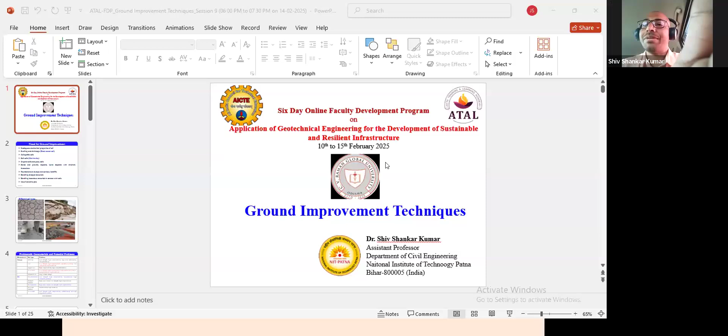So, Shiv Shankar, let me please share because we are presenting through mobile, so I should share. Yeah, please, I request you to please share. Yes, I understood. So, can you see the screen? Yeah, I'm able to see. So just let me make it big screen. Yeah, thank you. Please continue.

Thank you, Dr. General, and the team for giving me this opportunity to talk in this faculty development program on the application of geotechnical engineering for sustainable development and resilient infrastructure. The topic which I have been given is ground improvement techniques. It was challenging for me because I have mostly worked on the dynamic properties of soil, but it was interesting to see what new things can be presented at

this platform. What I will be presenting is the work of one of my students, currently doing a PhD under me, but this work was completed during his master's program at IIT Guwahati, and it is related to soil reinforcement. Here I will not only be presenting and discussing, I will also give some ideas where students can do research. That I will be putting at the end.

But yes, there are many things that can be done in ground improvement techniques. While I was looking into this, I understood that. So I tried to bring it here, especially for students doing research. They will definitely benefit, take some points from this presentation, and can go for the research as well.

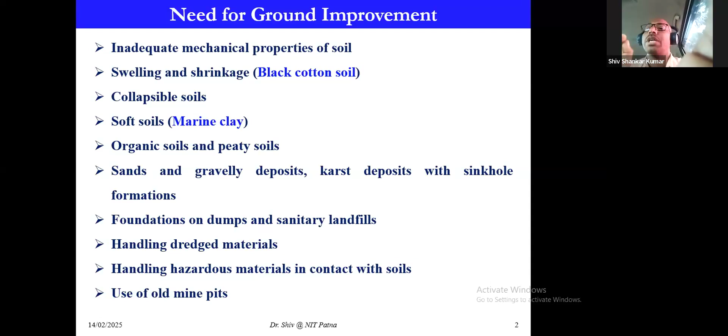So in whatever situations I am showing here, everyone can agree that yes, there is a need for ground improvement. Next, please.

So what are the criteria, and how this kind of cracking should be stopped or minimized, we need to look into. And yes, people are doing research as well, and you can also do research on what remedial measures are possible for this kind of cracking.

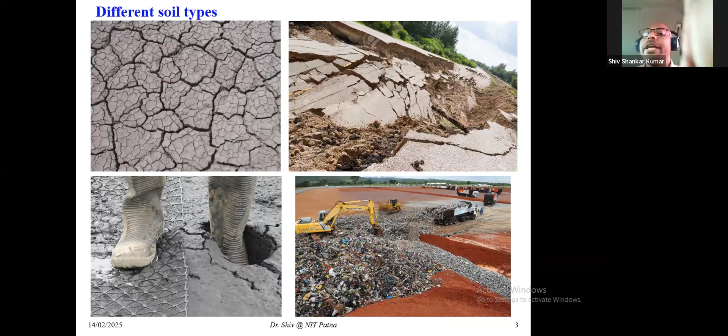So once you identify the problem, you have to find the solution as well, because as an engineer you have to find the solution. There might be places where the codal provision doesn't work properly, but you cannot say the codal provision is not working and deny the work. No, as an engineer, as a practitioner or academician, we have to look into the solution, and that way the major outcome will come up at that particular site. Next, please.

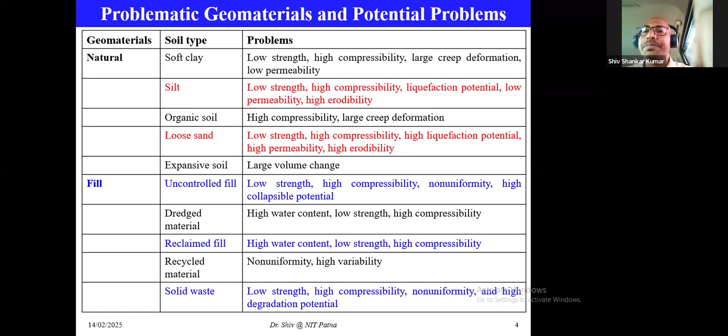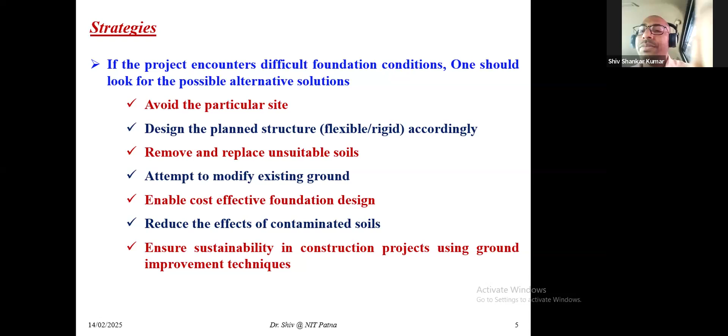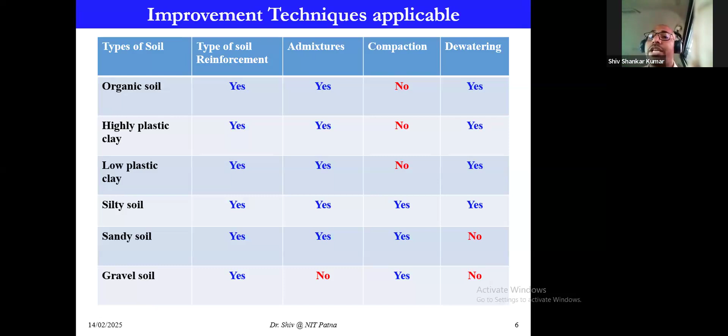When you are going for ground improvement, we all know some techniques are very popular, like compaction, dewatering, admixture - meaning application of admixture or grouting - and reinforcement also. Each and every methodology or technique is not applicable for all types of soil.

For some types of soil, a technique is very much effective. If you look at compaction, it is very effective for sandy type soil, silty soil, as well as gravel type soil. When you are compacting, you are basically densifying the soil structure or soil matrix by removing the air voids.

When you go for dewatering, you are also making soil particles closer by the expulsion of pore water present within the soil mass. So here you are basically changing the mechanical property by bringing the soil particles closer.

The same applies for admixtures. When you apply admixture or grouting, the state of the soil is basically changing. Let's say some soft soil or clay type soil is there, and you add some admixture in terms of cement, lime, or some other kind of grout - it changes the characteristic of the soil as well. That way, you achieve improvement in the existing soil.

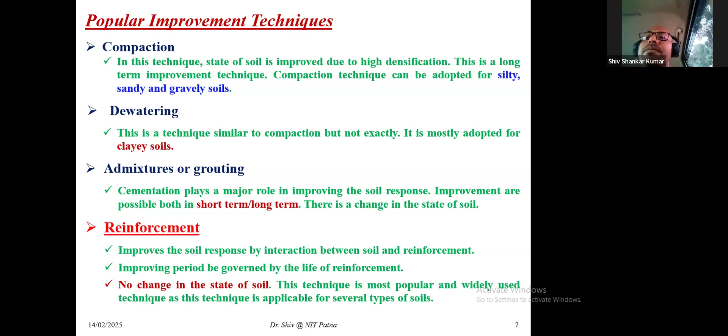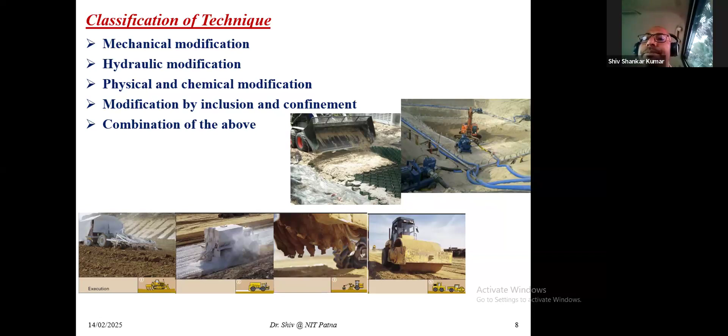Just putting lime into the soil, or just putting reinforcement within the soil, will not be that much effective. You have to go for some kind of compaction there also. That way, you will get a more effective solution, or a more effective compacted ground, for the particular design.

These are some figures showing how, when going for ground improvement, there can be several ways. One can go for ground reinforcement, ground improvement, or treatment. For reinforcement, this can be stone columns, nailing - these are all processes of reinforcement to improve the ground. For compaction or consolidation technique, we can improve the ground by blasting, dynamic compaction, or compaction grouting. And for treatment, using admixtures like soil cement or lime admixture can be implemented for ground improvement.

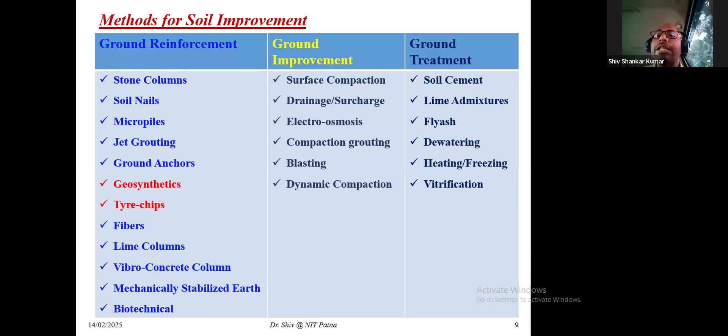So here what I will be talking about is geosynthetics in terms of geogrid application as well as tire chips.

The question always comes why we are going for the application of geotextile or geogrid. If you look at the function, it can give us several and multiple functions depending on what kind of geogrid or geotextile you are using. Here we will be talking in terms of geogrid and along with sand tire. The geogrid or geotextile has multiple functions, and in that way it can be used for many purposes.

Whatever technique you use - soil reinforcement, admixture adding, densification - the question always comes: what would be the main objective of using that particular ground technique? At the end, we look at whether the bearing capacity of the soil has improved, what the permeability conditions are, and what the compressibility conditions are. Ultimately we look at strength characteristics, calculating shear strength parameters like C and phi, as well as engineering characteristics like C, phi, and permeability. This tells us whether the ground has been improved or not.

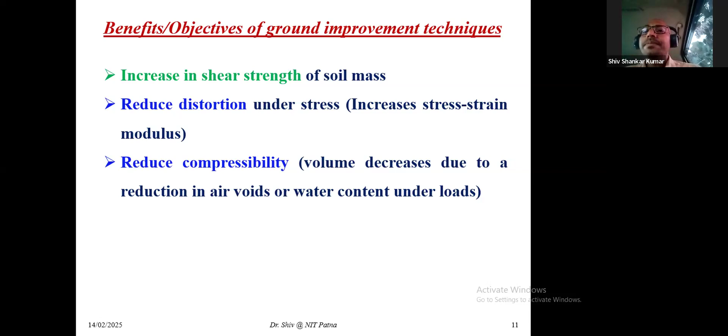The major application - in the previous section you saw where we can use geogrids or geotextiles. But from a practical application point of view, nowadays in most places, whether for rail track beds, sand drains, pipeline design to avoid huge failure, road pavement for durability and longer run sustainability, or embankment foundations and embankment slopes - geogrid, geotextile, and geocells are being used to make safe structures. These are the applications where engineers can look into the design section for geotextile or geogrid.

Since there is application of geotextile or geogrid, I will be looking at the application of geogrid and shredded tire, how we can implement it to improve soft ground, meaning soft clay bed - very applicable in pavement design. Because if you look at a pavement stretch with soft ground, the question always comes: can you replace the material, and even if you replace it, will it be feasible or cost effective?

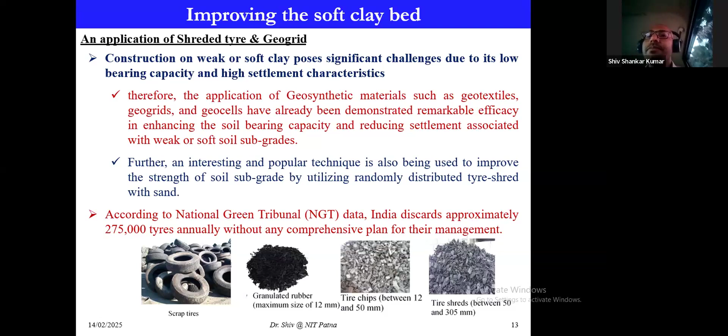As I told you, using rubber tire can create some environmental challenges. But when you look at the improvement in terms of durability, resistance to fatigue, flexibility, and tensile strength, this kind of material like tire and geogrid reflects significant improvement, and by that way we can think about its usability in improving the ground.

So for this particular study, ground improvement using tire chips along with geogrids was studied - a separate study has also been done with only tire, and along with tire and geogrid - just to reduce the settlement and improve the bearing capacity.

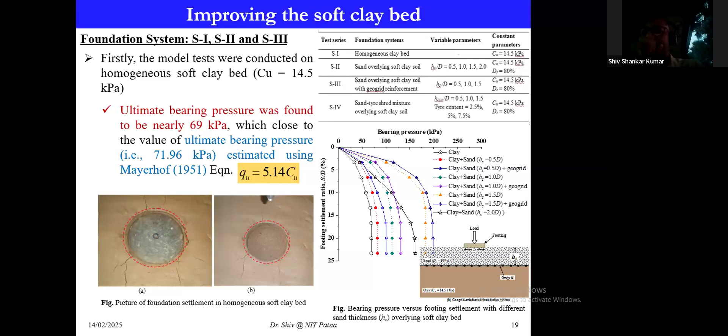And when you are increasing this sand layer, this improvement is not significant. It is basically showing the reduced value of the improvement factor. This might be due to the stress distribution, how it is going to happen within the soil mass which is below the foundation. Next, please.

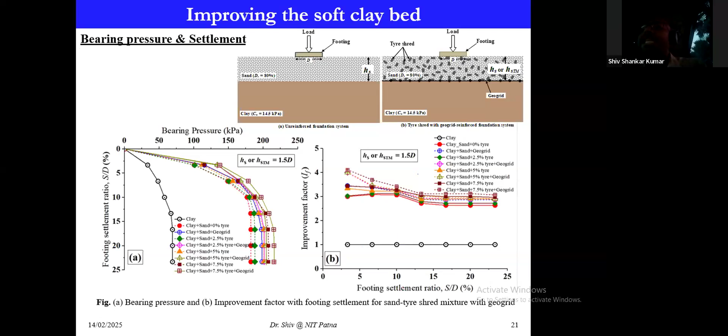So this is basically showing you that along with the geogrid, the sand tire mixture has also been added. So in comparison to only the geogrid, this entire combination is not significantly improving, but if you look at the small value also, there is some increment in the strength while adding the tire mixture in the sand. So from this research, basically I can say that application of sand, application of shredded tire, can be useful for the improvement of the soft clay ground.

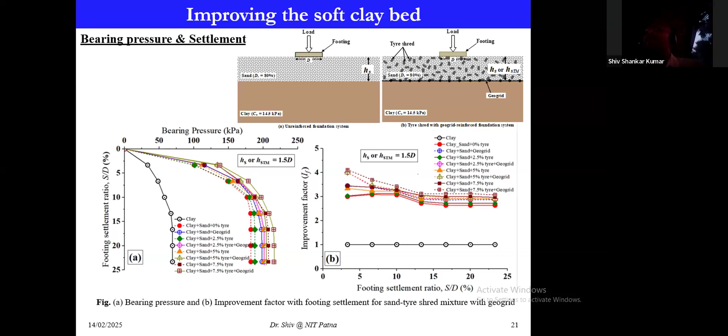So from this figure also you can see how we can improve the bearing capacity of the soil. Basically here the force between the tire chips and the surrounding soil is increasing, and by that way the increment is going to happen. Next, please.

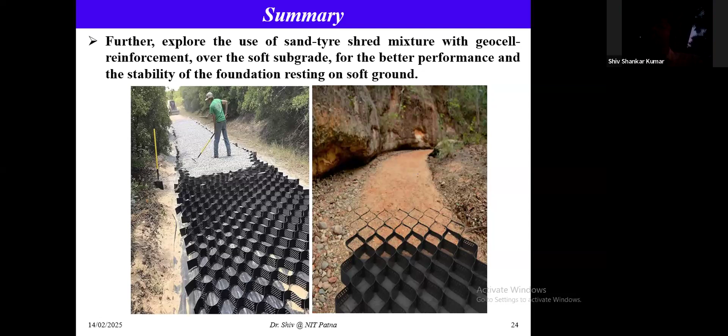First, let me thank you, Shiv Shankar. I'm so happy to have you because even though I have put you in a tough situation, you had a site visit today, still you somehow managed to appear in front of us for your delivery. So that is the beauty in your cooperation with us. And we all faculty are grateful and thankful to you, Shiv Shankar. Thank you so much for giving me this opportunity. It's after so long that we are interacting with each other. Thank you one and all present here. I think Arindam sir is here. Thank you, sir. Thank you for listening to me, sir.

It's always interesting to listen. I have a little question. Hello. Yes, please. Hello, sir. Yes, please.

Sir, can you explain the test setup? How have we done it, making a tank? See, actually, this I have not done. One of my PhD students is doing it under me right now, but he did his master's under my MTech supervisor, Dr. A. Murali Krishna, and recently we have published that work along with Murali Krishna sir, me and the student. So that work I am presenting.

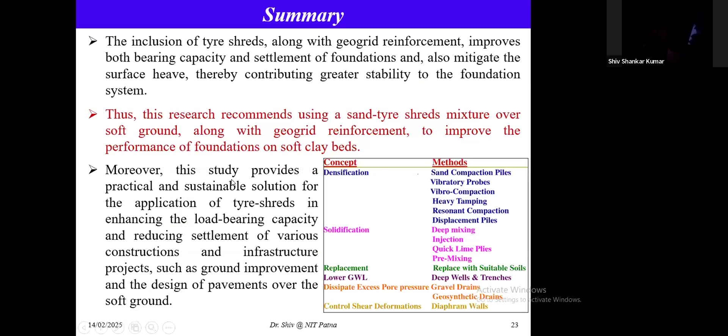Firstly, no, back, figure number 5, maybe somewhere in the initial section. Back, sir. Still back. Next please. Still next. The setup figure is there. Yes, this one.

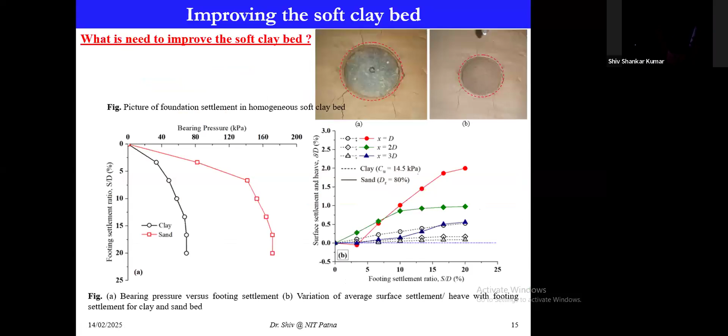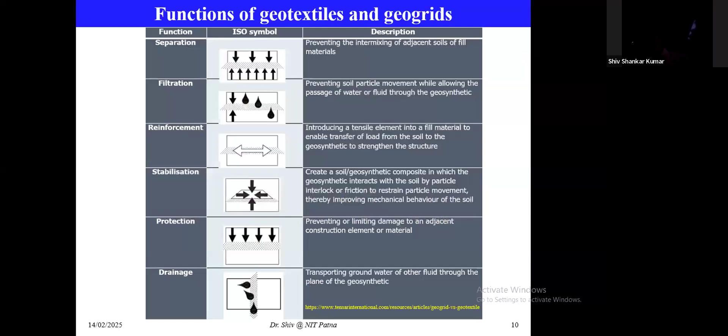So here you can see the right side figure. The first figure, soft clay bed. So firstly, what has been done? The soil was brought from some locations, a small amount of soil was taken, and some amount of water was poured into it to see whether it reflects soft soil. So that was identified based on the undrained bearing capacity.

So undrained shear strength. And you all know that when you add water to clay soil, the strength of that particular soil reduces. And if you look at the range of the undrained strength of soft clay, it comes under the range of 0 to 25.

Definitely 0 will not be, but maybe 2 to 25 within that range. So you can put 6 kPa, you can put 13 kPa, you can put 20 kPa, whatever the value, it is reflecting the soft soil. So in this study, the student was basically choosing the 14.5 value and indicated that as a soft soil.

So what happened? Initially they have kept the mold into this tank layer-wise, and at different locations they have collected the sample also, just to check back whether the soil kept in the tank is similar in strength or not. So the trial has also been done in the tank and found that whatever placing technique they have adopted in the tank is also reflecting the same value of the shear strength, and by that way they continued the test.